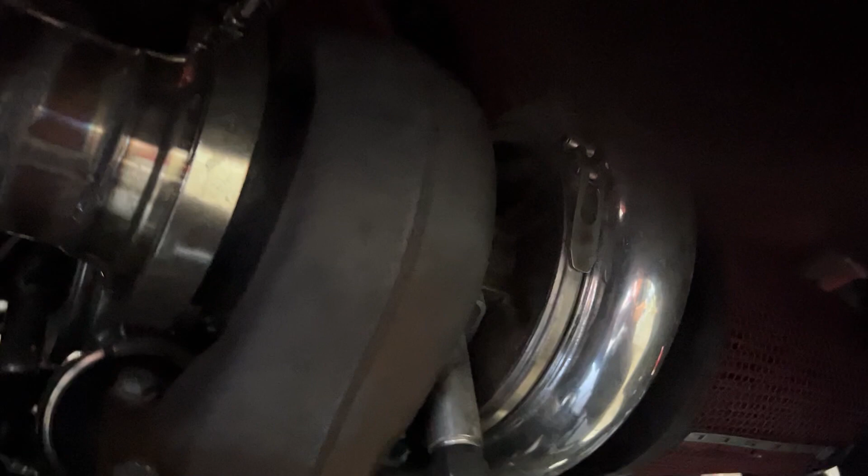Today's going to be a great day. I'm excited because today we're building an engine. It's one of my favorite things to do in the shop, building engines and transmissions. And today we're building an engine for my truck. This build was initially going to be for that other Mega Cab that I showed you guys.

We were going to keep it, but some things have recently changed, and I will share with you guys those changes as soon as I can. But as of right now, I gotta kind of hold it tight to my chest. It's gonna be good news, guys. Trust me on it. It's just gotta kind of hold it.

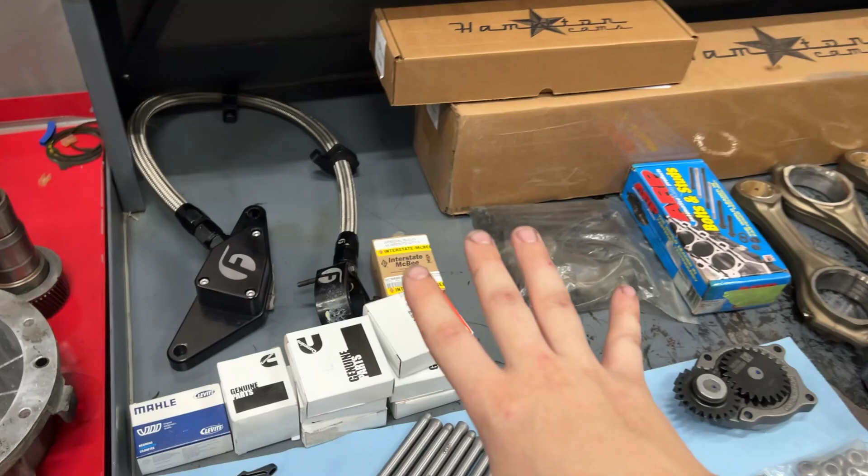So anyways, guys, let's go ahead and dig into the parts we have here, and we'll go over what the purpose of this build is. All right, to start off with, guys, we got this beautiful table full of awesome parts. We'll go ahead and start over here. So first off, we got this Fleece coolant bypass kit. It's a used one. It's one that I had on the initial build of the Mega, and I took off because I had this build planned. And this engine is going to be set up more for towing rather than making huge horsepower. As you guys can see, we got stock common rail rods.

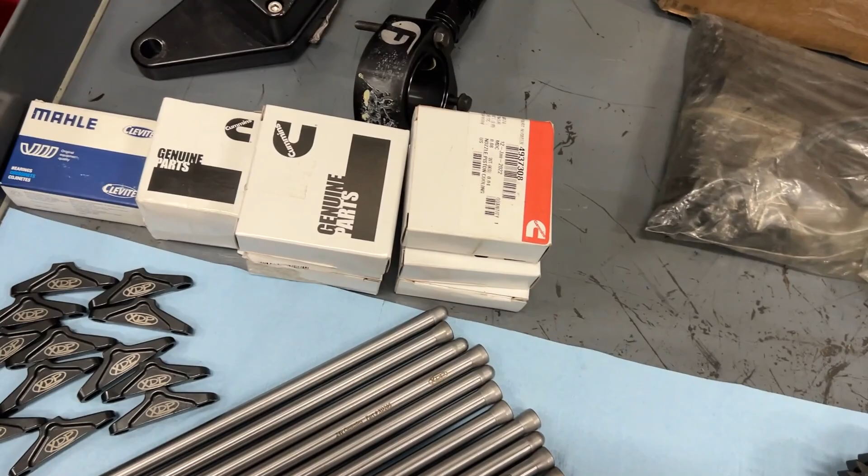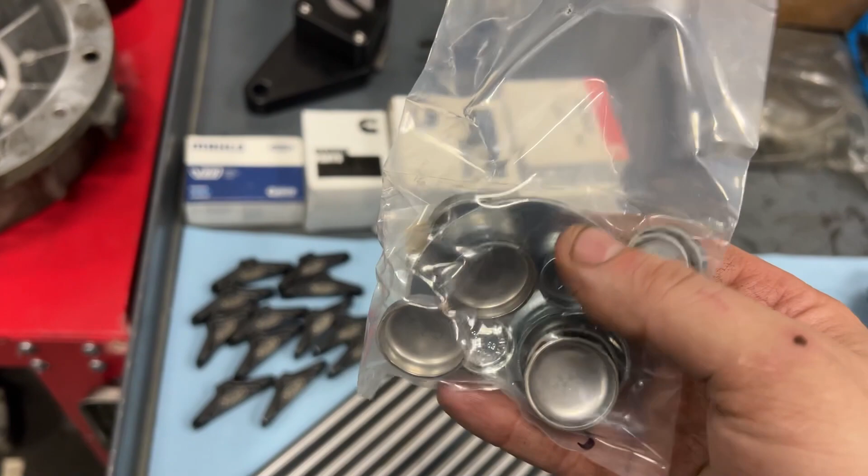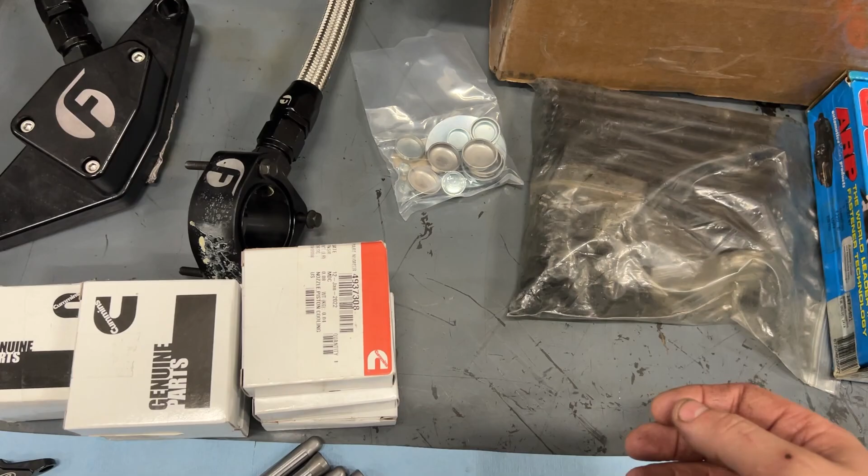But moving on, we got an Interstate McBee freeze plug kit. This is basically, it comes with most of your freeze plugs. It is a 12 valve kit. You can tell by this rear cam plug, but it comes with the freeze plugs for your oil galleys through the block, and it comes with some of the other ones that we use as well. I had the kit before that I was buying that came with the head dowels, but can't seem to find it. I'll have to do some research, but this is the kit we have right now.

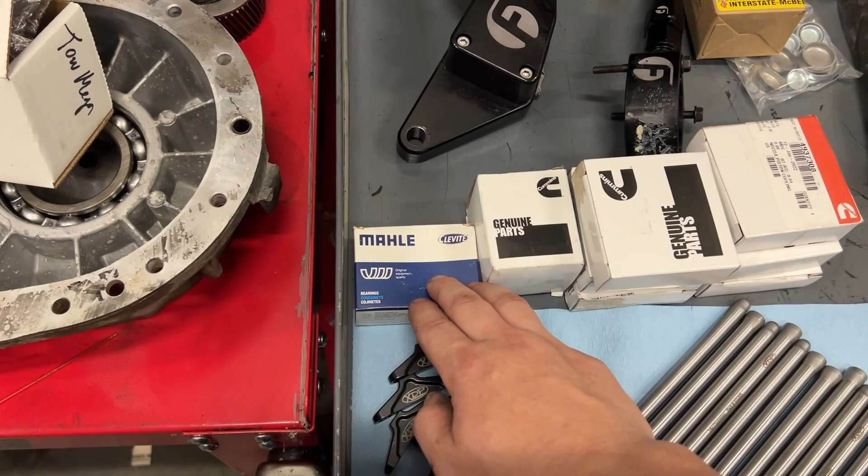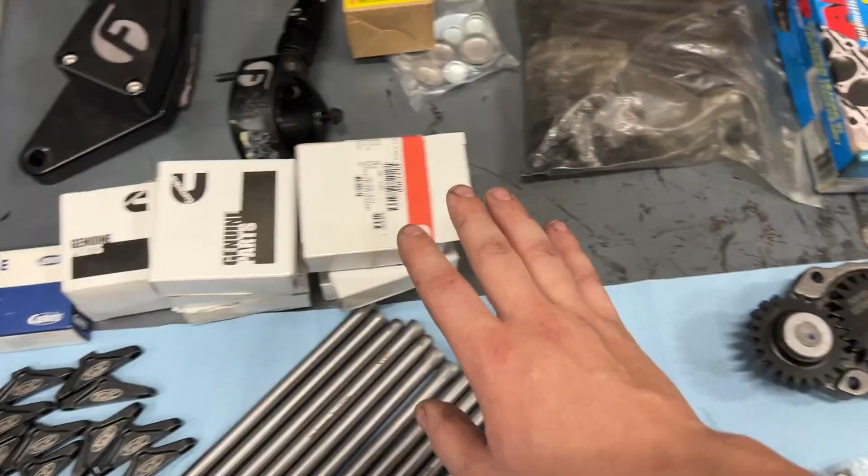Moving on, we got a Mahle cam bearing, and then we got a Cummins OEM thermostat, and then some more leftover parts from the 6.7 build. You guys remember when we built this engine a couple weeks ago when it blew up? I had these overnighted, but we went to Power Driven. We got some Cummins. These are basically just the piston oil coolers, J-Jets, whatever you want to call them. But yeah, that's what we got here. And moving on, we got of course an OEM Cummins oil pump, and I do have an oil cooler relief valve coming as well, just not here right now.

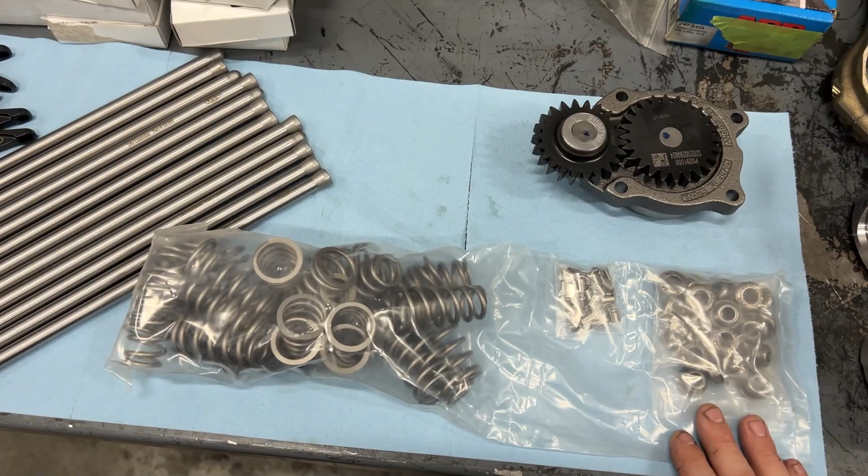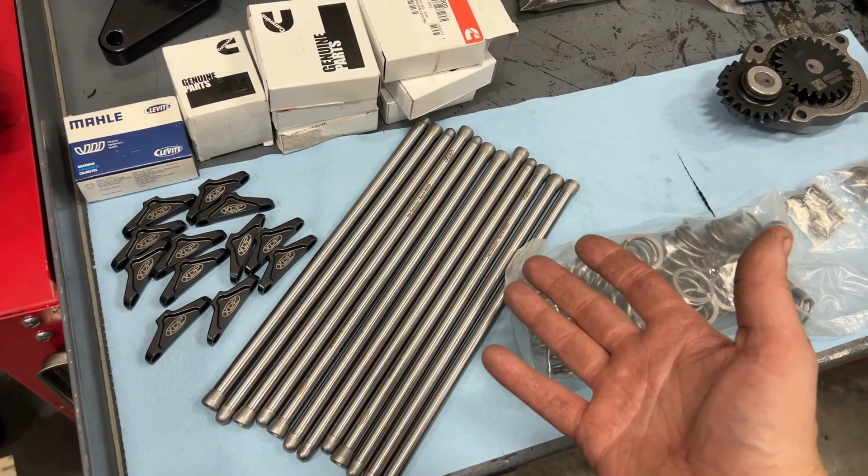I really appreciate them. But to start off with, we got of course some billet valve bridges, and then we got our 7/16 push rods. I went with the 7/16, even though this is a light build, because I don't see a reason why not to. They were about 40 bucks more than the 3/8 push rod, so I figured why not. If we do want to end up turning up this motor in the future, we already got the hardware for it. Also, it's not bad to have extras for the race motor, or basically have the same part so everything kind of moves around as I need.

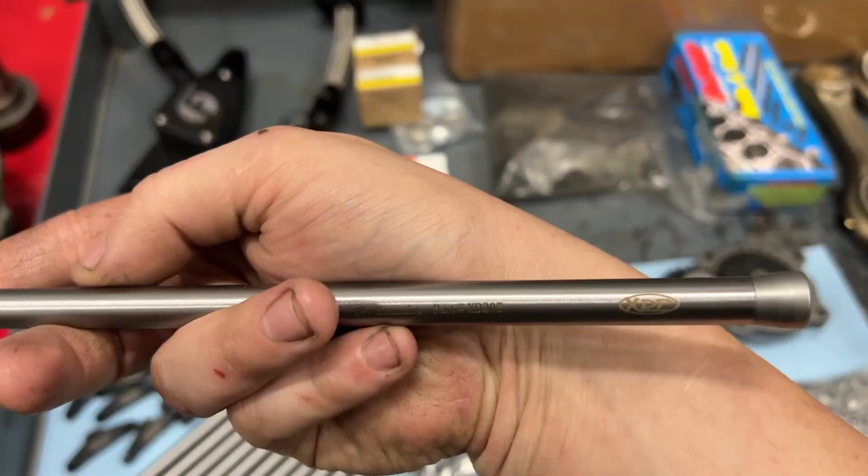And then for our valve springs, we went with the XDP ones as well. These are the higher strength for being able to turn up the boost. Again, I don't see a downside to upping all this, even though we're not going to be pushing major power right off the bat. And if you guys don't know, this is basically just Manton stuff, it's the same thing that a lot of companies use. They just rebrand. This is a Manton part basically that everyone rebrands. I mean, 90% of these companies out here, that's what they're doing. Nothing wrong with it. Can't blame them. One day I plan to do the same. Anyway, for now, I choose to go with XDP because, again, they take care of me. They always have it in stock, and the price is competitive, at least for me.

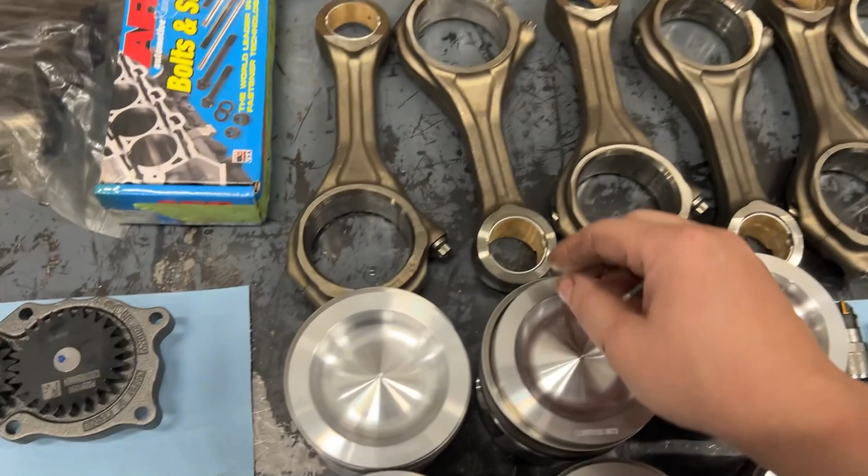So moving on, we got, of course, all ARP hardware throughout the motor. We got ARP rod bolts, and we already had the rods resized and checked, because when you get these ARP rod bolts and really any ARP hardware throughout the engine, what it's doing is providing extra clamping force. So this isn't a perfect circle. Now you take this extra clamping force and you've now changed that circle even more. Usually you make it tighter, so then you got to bore this out to get the clearance that you need as far as the oil clearance to the rod journals on the crankshaft.

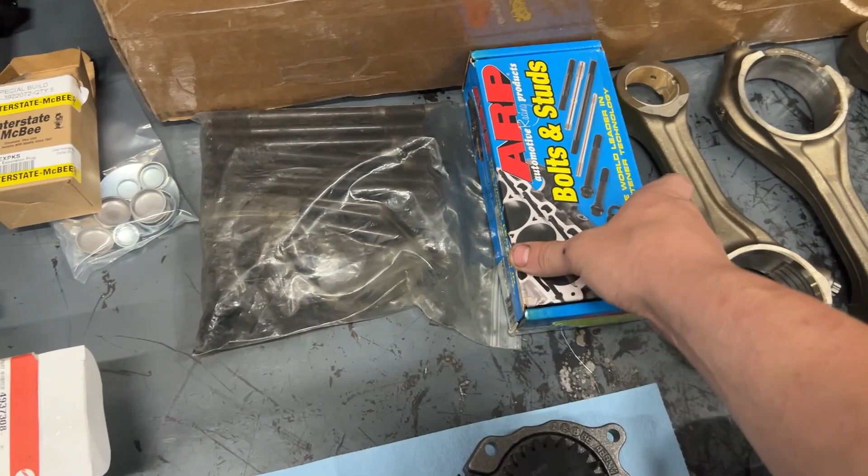We also got ARP main bolts. These are just 12mm mains, nothing crazy. Again, really the only reason I'm even going with these is because I had them.

This is actually, a lot of these parts too are left over from another build that didn't happen. So it's kind of just recycling old things. So we got ARP head studs, just regular ARP 2000s. But yeah, that'll work. And then of course we got ARP flex plate bolts, ARP harmonic balancer bolts.

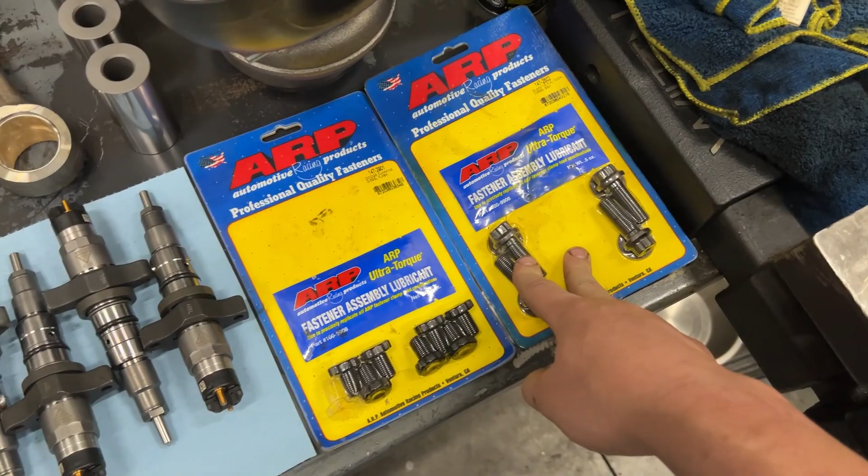Moving on, we got a Hamilton cam. And of course you got to get their tappets if you're going to run their cams, otherwise there's no warranty. It's a 178 208 camshaft. Now this is their towing camshaft. This is supposed to be good for small singles or small compounds.

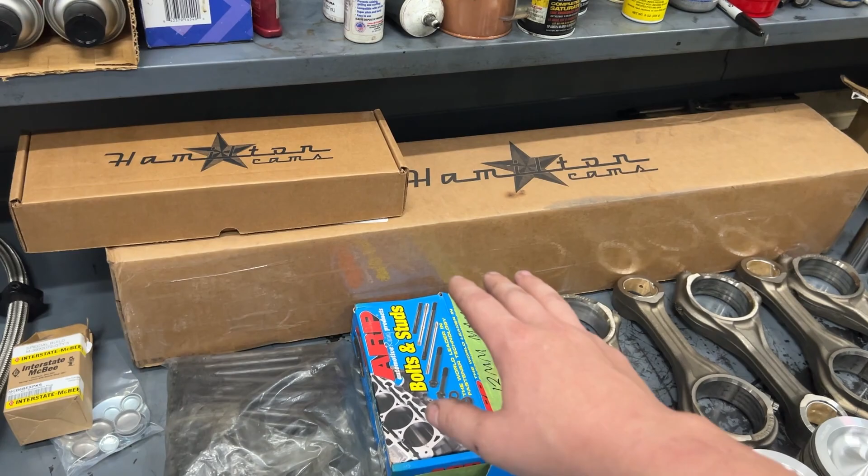Really just good for keeping the torque in the low end, allowing you to have just a good overall street mannered cam, as well as helping you with towing. I'm really happy we have the 188 220 cam in the 6.7 motor in the Mega. Been happy with it, so of course went out with the Hamilton cams again for the new build.

Moving on, we got some regular 5.9 Cummins pistons from Mahle. Nothing special. These are the wide bowl design. Now these were actually the original pistons I was going to use on the Mega's engine. I was going to do a sleeve down 6.7 to 5.9 bore and use these pistons.

But then everything changed. I ended up finding a good 6.7 block back in the day, and that's why we went with the 6.7 bore. So these are left over. So again, just kind of recycling old projects that didn't get finished or that changed direction a little bit.

Moving on, again, we got the rods. They're just normal rods, 5.9 common rail rods. We just had the ARP rod bolts put in. Went ahead, resized the big end. And then of course we got new small end bushings, wrist pin bushings put in and sized up for the wrist pins themselves.

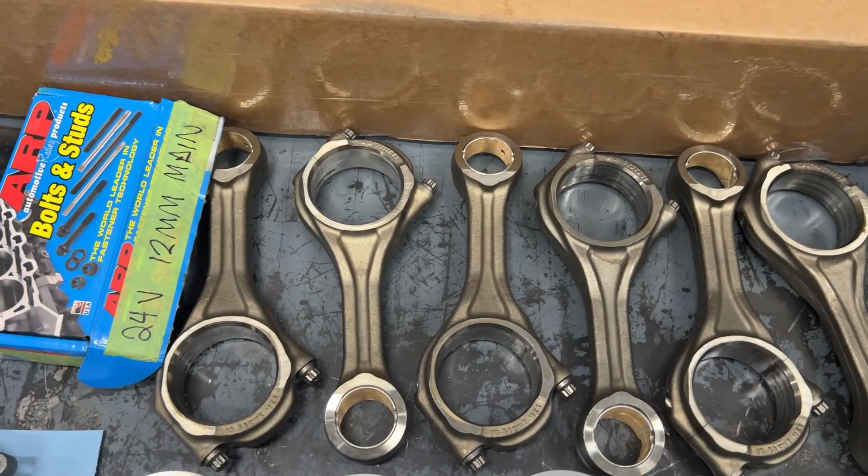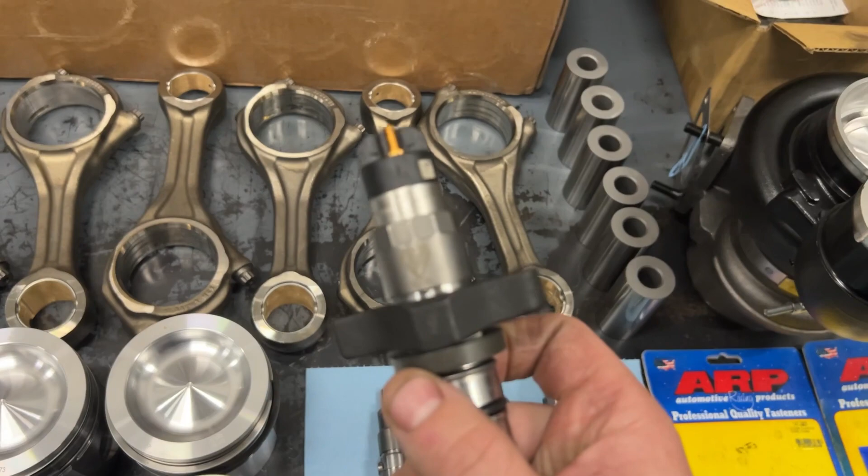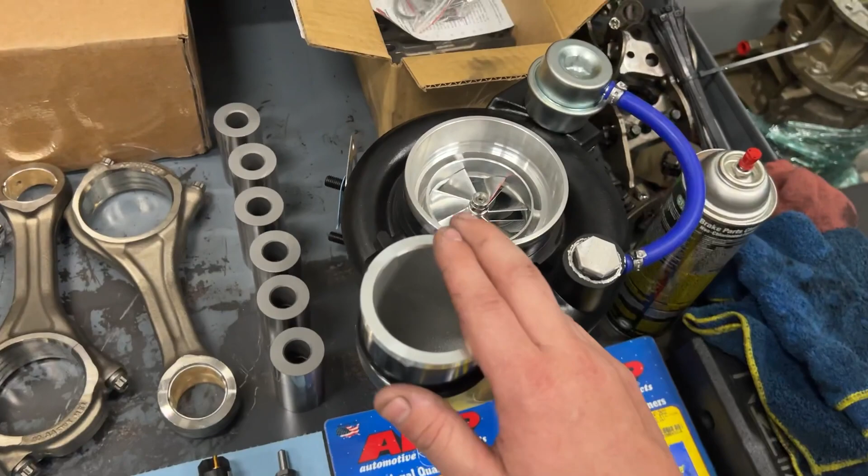Now for the power adders of what we're gonna run, first off, you guys know, DDP only around here. We went with the DDP 120 horse injectors. Basically a 45% over that will pair well with this 67 mil Taterbilt turbocharger.

So this build is meant for towing. I know this is a bit of an aggressive charger for that, but I will kind of explain to you the secondary goal of this build and why we spec'd it out the way we did. Obviously there's some other things we're not showing. This isn't a full build.

We got just basically Interstate McBee upper and lower gasket kit. I got the head fully rebuilt. The engine block is fully machined. And we're just gonna run basically a stock gasket setup, no fire ringing, nothing like that here.

All right, guys, now you know what we're putting inside this engine. Now we gotta get outside. We're gonna go put the engine block on the engine stand. We're gonna get it cleaned out. Then we can get it in here in the room and start working on it.

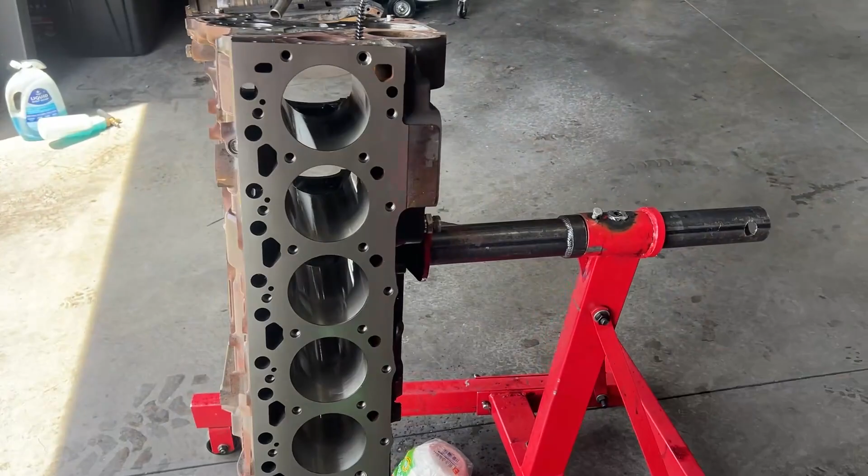All right, so we got the block all cleaned up. You've seen pretty much what we use. A little bit of Dawn dish soap, an Amazon special foam cannon. Got these Moroso engine brushes that you can get on like Summit or Amazon probably. I just keep them here because this is where I always clean up the engines. And then, yeah, so go through, scrub it all real good.

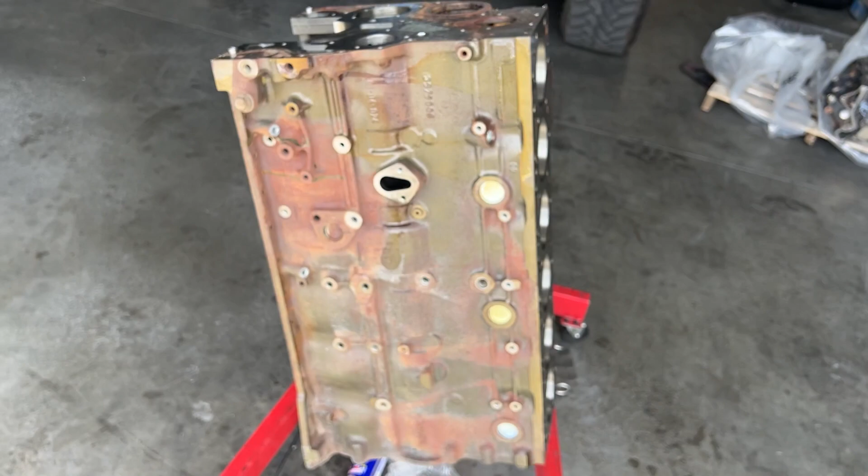Make sure you get the cylinder bores, but the main things are all of your oil galleys. The oil galley on the back side for the oil squirters for the pistons wasn't popped out, the plug wasn't, so that means they weren't cleaned out. Now the machine shop does do this cleaning usually, but we just do a bit more of a detailed cleaning. This is a trick that I learned from my buddy Josh McCormick.

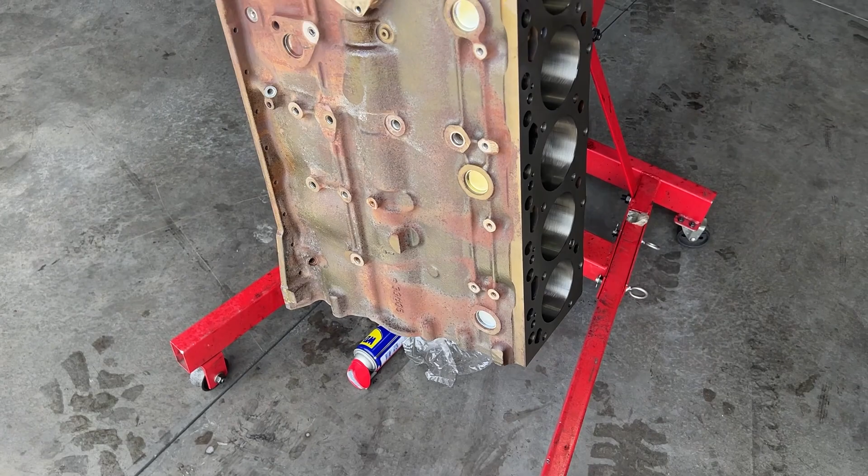And I found that they actually leave the least amount of residue as far as like that fiber material after you wipe down everything. They still kind of do on these hard cut surfaces, but I don't think there's anything out there that won't, so you just got to be careful. But they don't leave residue when you're wiping out the cylinder wall and everything, so I use that as a final cleaning. Then obviously once we're done, went ahead and WD-40'd all the metal surfaces so they don't rust. But little update over here.

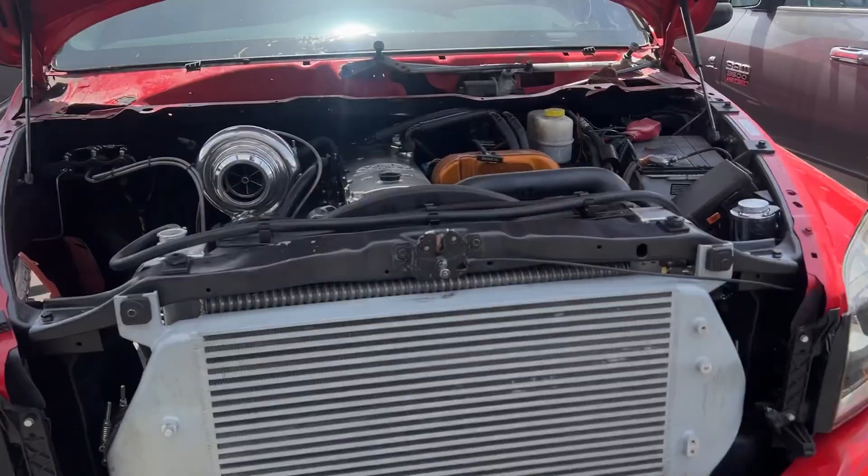As you guys can see, she's just sitting. And like I said, I'm building this engine to put in here. Originally it was going in there, but a lot of things have changed in the last week or so. As you can see, we don't have the compounds on.

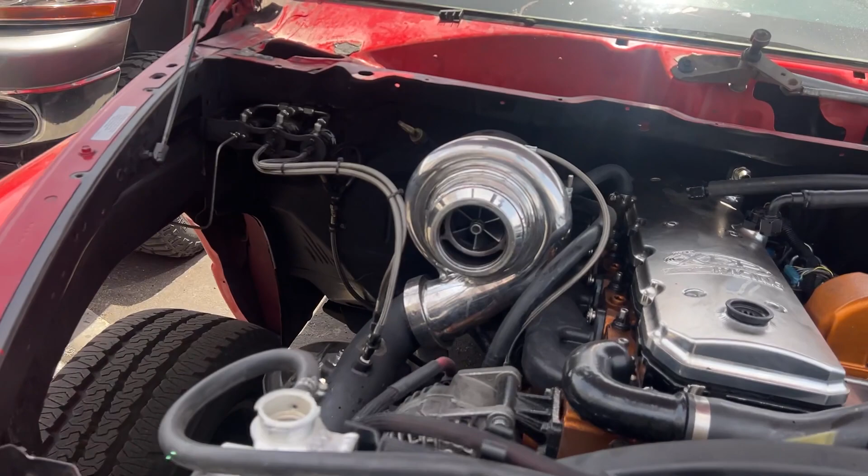I took the Power Driven 88 and sent it back to Power Driven. They're rebuilding it. It's a used unit. They're only charging me a few $100 to fix it. Like I said, it was used, so it's not like it was a warranty. I mean, she performed well within her bounds of reasonable use, I guess. But anyway, the engine's still running good. Everything's still working. The only downside is after we made that 1400 horsepower hit at Randy's dyno event,

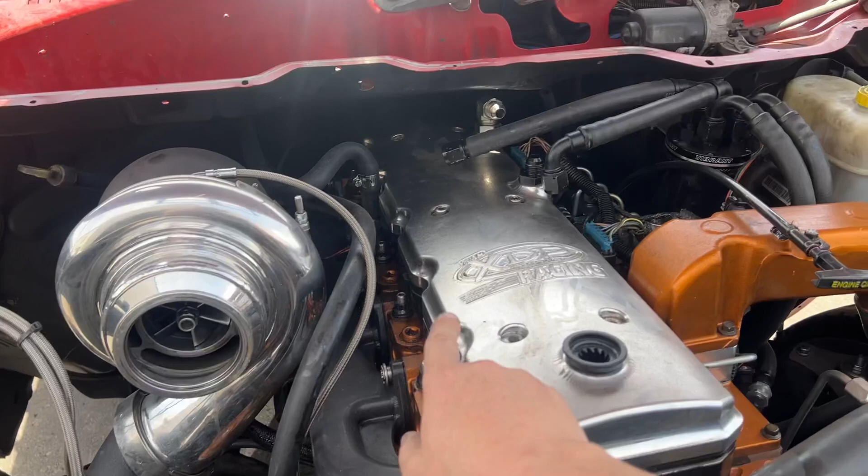we went back to the shop obviously, and I did an oil change, and there was actually quite a bit of coolant in the oil, at least a quart or so. So obviously thinking head gasket, went ahead, drained it, and then pressurized the cooling system. And I actually found that 2 of the studs under the valve cover are leaking coolant past those studs, and about 3 or 4 of the freeze plugs, the thread-in freeze plugs on this head, were leaking.

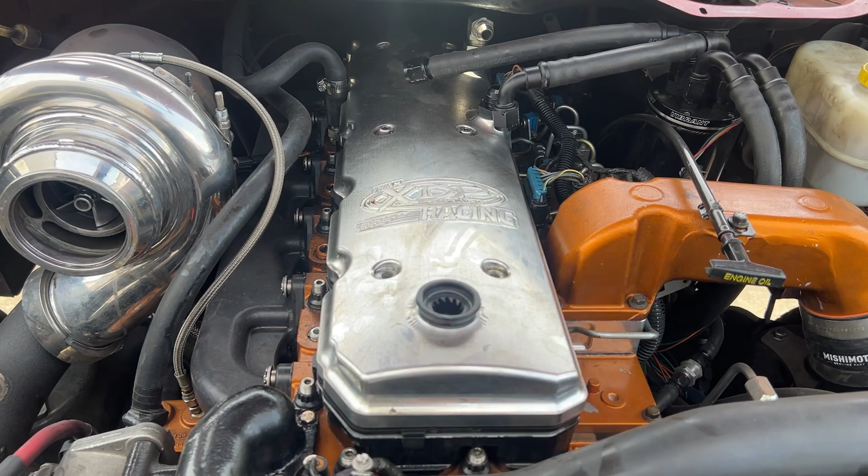So went ahead, resealed all those freeze plugs. I think there's a problem in the thread tapping in the plugs themselves. We'll find out. And we did a hot retorque. I just left the coolant out so it wouldn't drain into the crankcase again. And did a hot retorque, tested, still leaked, did it again. So I did about 3 hot retorques, and I did cold torques in between those, just to try to save the gasket a little bit. I knew it wasn't gonna last forever, but I was hoping I could drive it for a little longer.

Not the case. So I got 2 new Haisley fire ring gaskets again, and they were pretty much the last 2 that you can buy at the moment. So sorry guys if you were looking, but basically what we're doing is we're going to take this head off. It's a Power Driven ported head. They're stage 2, 3, or whatever. They're supposed to be like the race head.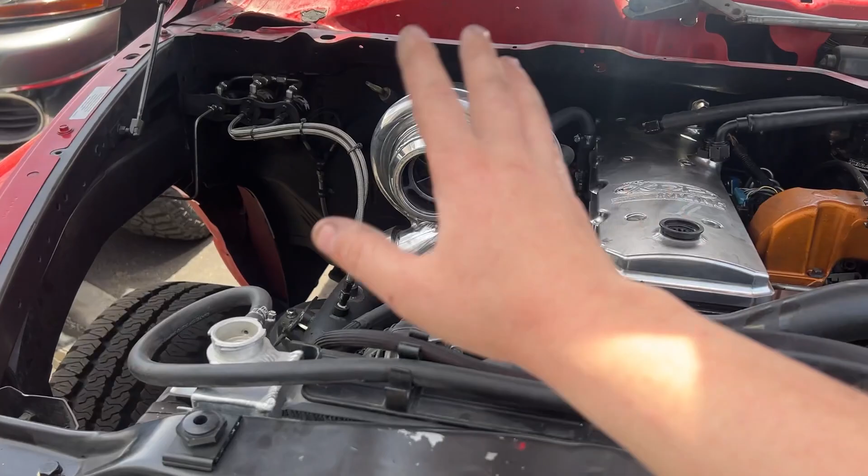I'm going to have the threads redone for the freeze plugs, and get new freeze plugs in there so they don't leak again. Have the head machine surfaced again, gone through, new seals, whatever. Then I'm going to sell this head because I actually have something better in the works that I will share with you guys when the time comes. So that's why we're going to pull this motor out and kind of put it to the side for a minute. We're going to work on some new stuff. I might change the fuel, might change the air. We'll see. I don't know.

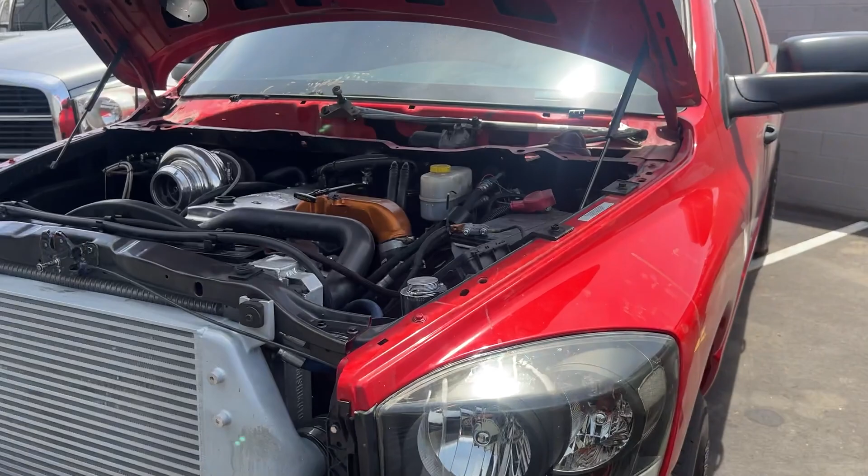But anyway, we're going to pull this motor out. I need a daily driver. My poor truck just sits here right now, and I miss driving it. So yeah, guys, that's pretty much why we're building this engine today. Even though we don't have another truck to put it in, we can put it in this truck and at least have something to drive for a while and still be able to play with it. So let's get this in the engine room and get started on it.

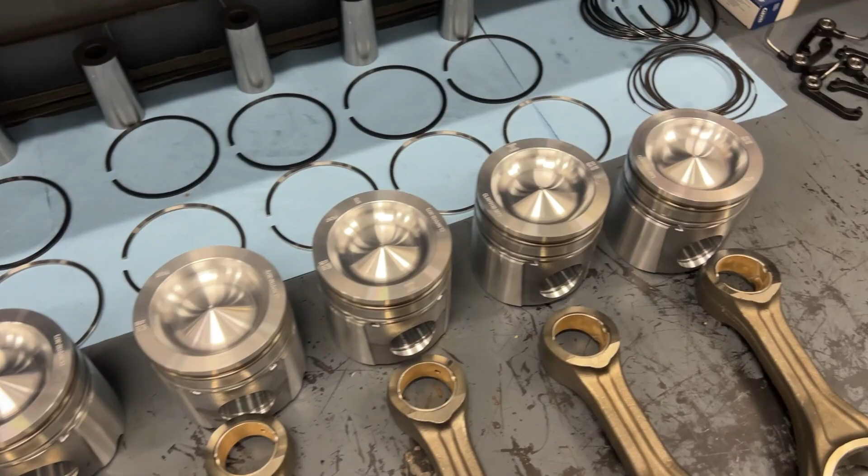All right, guys, so what you've seen, I went ahead and basically we got all of our cylinder specs done as far as double checking the diameter of the pistons. And then we also checked all of our ring gaps. And of course, we checked our piston to wall clearance. This is another thing that the machine shop does, because ideally you send out your pistons with your block. You tell them, hey, this is what I want it bored or honed to. In our case, we got a standard bore 5.9 Cummins, and we were able to just hone it out.

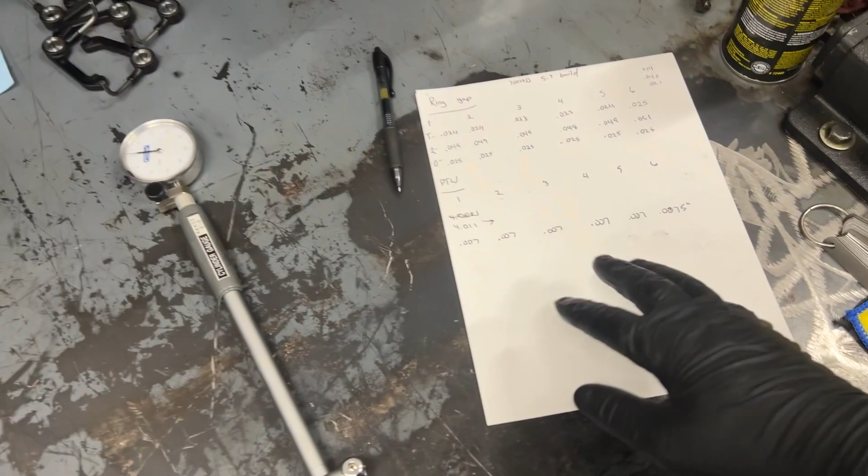I was shooting for 7 thou piston to wall. I ended up perfect, dead on, and with an extra 1/2 thou on cylinder 6, just so it can swell up a little bit more with heat. Again, this is something that the machine shop does already, but you just want to double check, make sure yourself. Doesn't hurt ever.

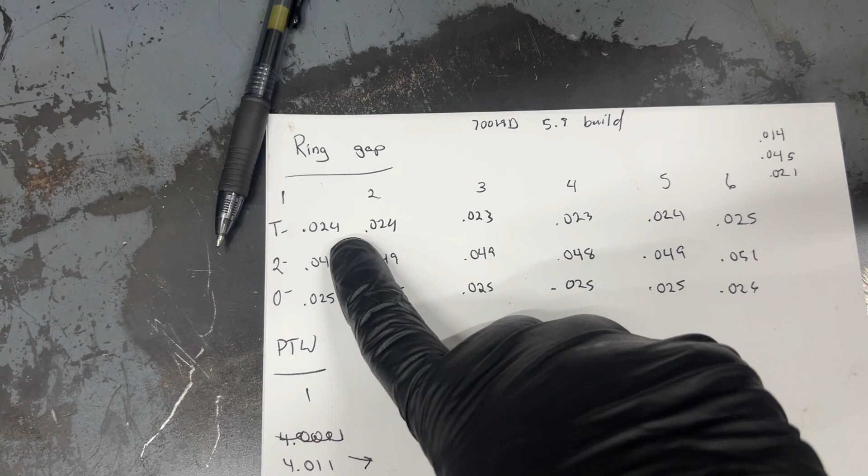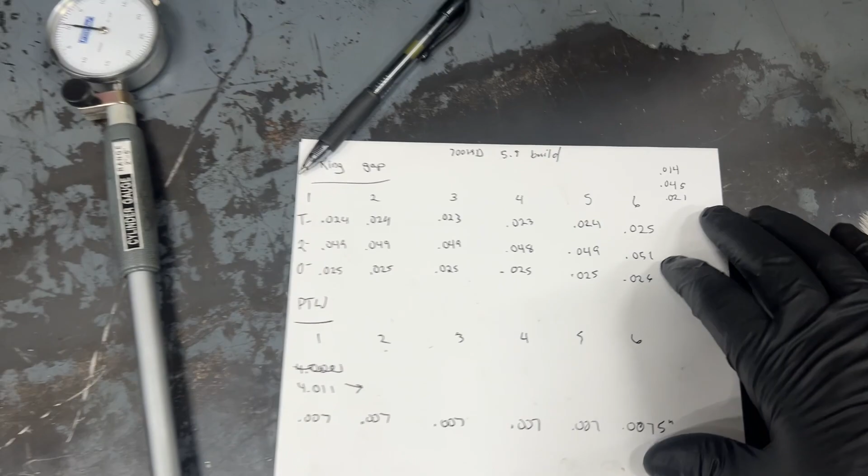Basically, this is what we got for our specs. We got 24 thou on our top ring gap, about 49 thou on the second ring, and 25 thou. I mean, it changes a thou here and there. Obviously, number 6 is a little bigger. So I think I'm happy with that. This is basically stock spec. You're looking at 14 thou, 45 thou, and 21 thou.

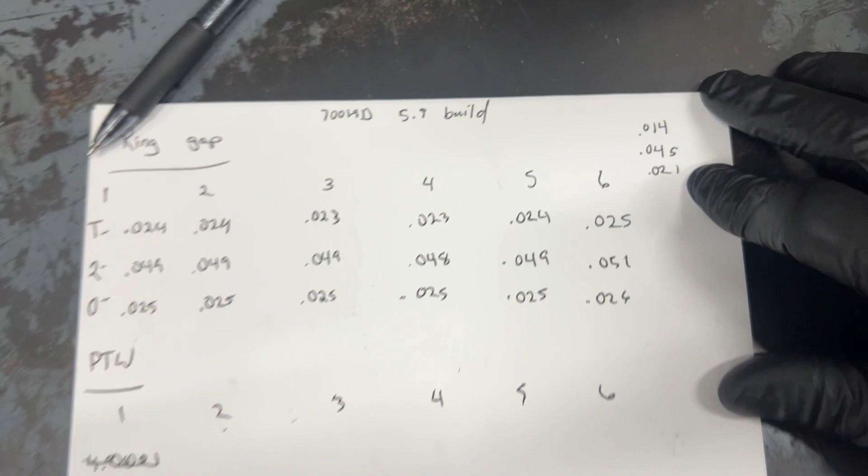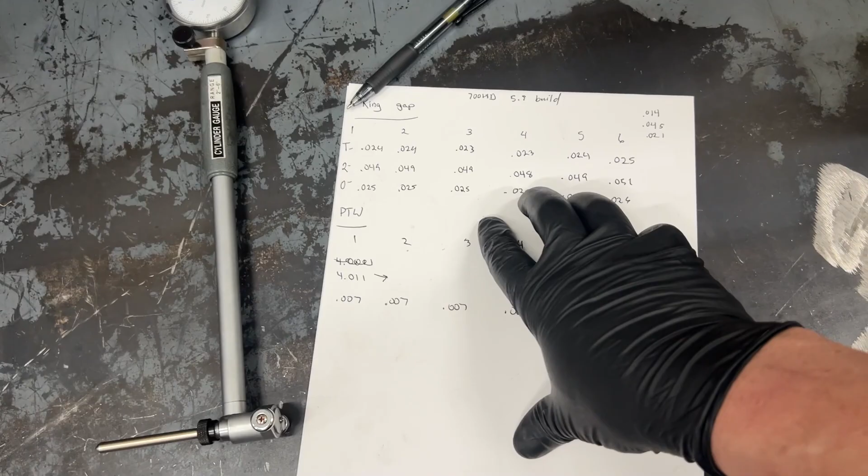I may or may not change these, open them up just a little bit more. If it was a customer build, I'd probably leave it alone. But seeing as I know I eventually will beat on this thing, I would like to have a little bit more leeway. Maybe not. I don't know. I'll kind of make my decision. We'll see. But really, the reason why you want to have more ring gap than factory, obviously, like I said, this is factory spec, and we got a little more piston to wall, our 7 thou piston to wall.

I believe max spec, I'll double check, but I believe max spec on a 5.9 standard bore in the service manual is about 4 thou piston to wall, maybe 5. And basically all that means is just this little bit of gap that you have between the cylinder wall and the piston itself. So the reason why our ring gaps are bigger and our piston to wall is more than stock is because when you get these really hot, these are cast pistons, when they get hot, they're going to swell up.

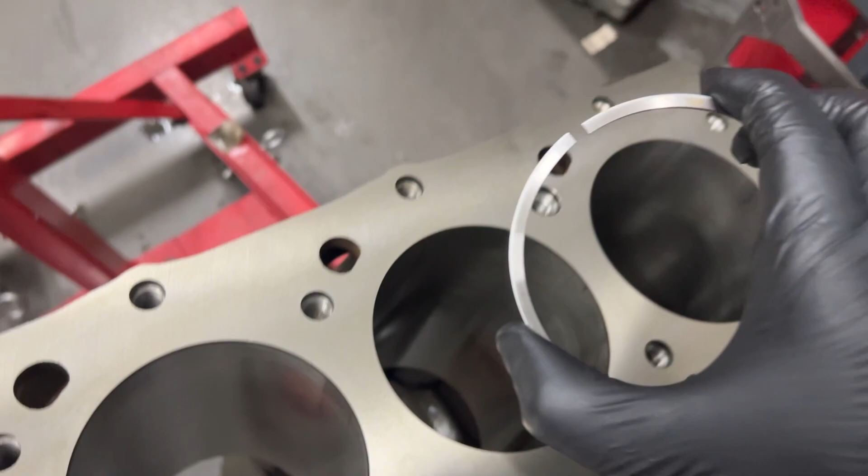They're going to actually get bigger, right? Metal expands, especially cast. It expands kind of quickly. So you want to have some space in between your cylinder wall and your piston so it can do that. Now, the reason why you want more ring gap is because as that piston expands, it's going to push that ring into the cylinder wall, right? So you're going to lose the distance, and that ring is going to get tighter and tighter. And what you don't want is these two ends to butt. As soon as they butt, boom, and that's when bad things start happening.

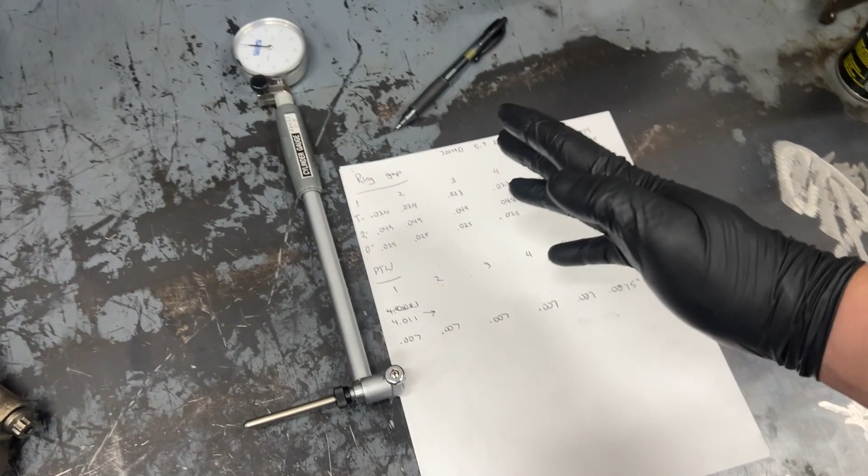So that's why on a stock engine, you will stick closer to these factory specs. I still like to get on the higher end. There's really nothing wrong with going on the higher end. But in this case, since it's a more performance-oriented engine, we definitely up the clearance quite a bit. If you guys remember, the 6.7 motor for the Mega is quite a bit bigger, but also it's set up to do a lot more power than this one should ever see.

So now we'll get the engine flipped over. We'll go ahead, put the mains in. We'll get some bearings going. I did forget to show you guys, I'm running the Mahle H bearings for the mains, and we're gonna hope these Mahle HX bearings will work for the rods, which they should, because according to Russell, these were measuring on the smaller side of specification. So hopefully the HX, which has a thou extra oil clearance, will be the ticket, because I don't have any other bearings. So let's cross our fingers there.

And same thing with the H. I do have HXs if we need. We'll find out. So I guess next thing we should do is go over there. We'll measure the crank, get the block flipped over, and we can start speccing out the bottom end as far as oil clearances on the bearings. So let's go.

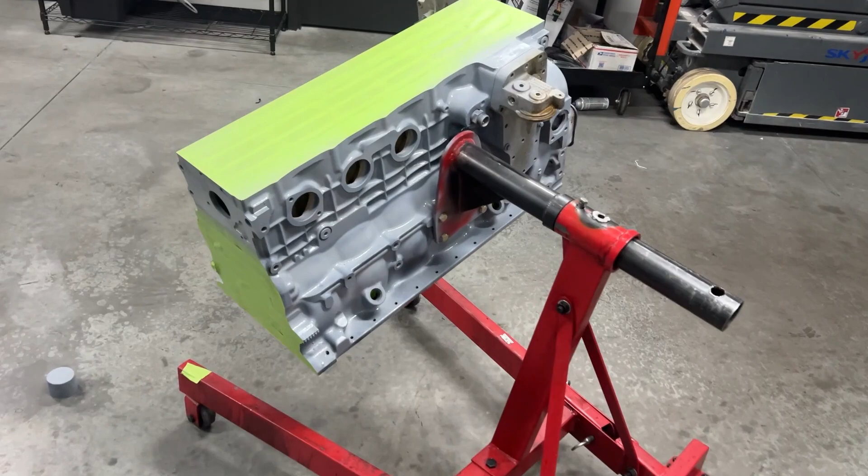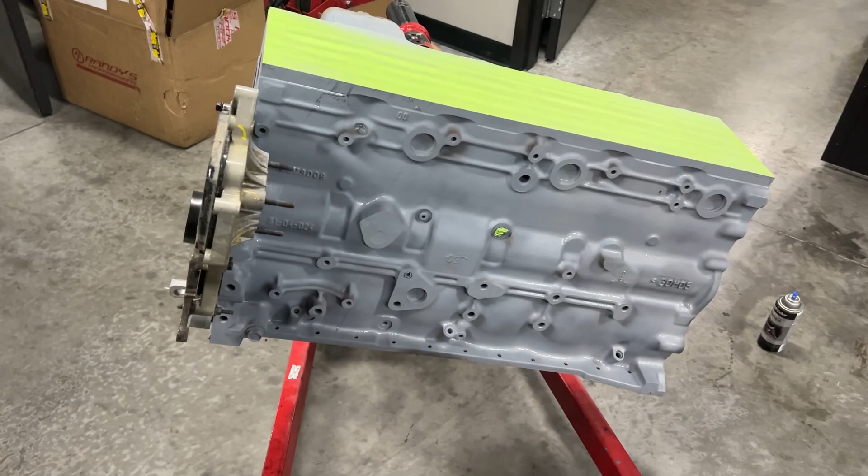So we got the block all specced out. Mains, right around 3.5 to 4 thou oil clearance. And again, I showed you, we got the piston set up. So now we're waiting for rod bearings and a few more things, so not much we can do. So gonna go ahead and start painting it. Got the first coat of primer down. This is the stuff I usually like to use, the Dupli-Color engine primer. I do about 2 coats of primer. And then we'll do 2 coats of paint, and then 2 coats of clear, and that usually seems to work pretty well.

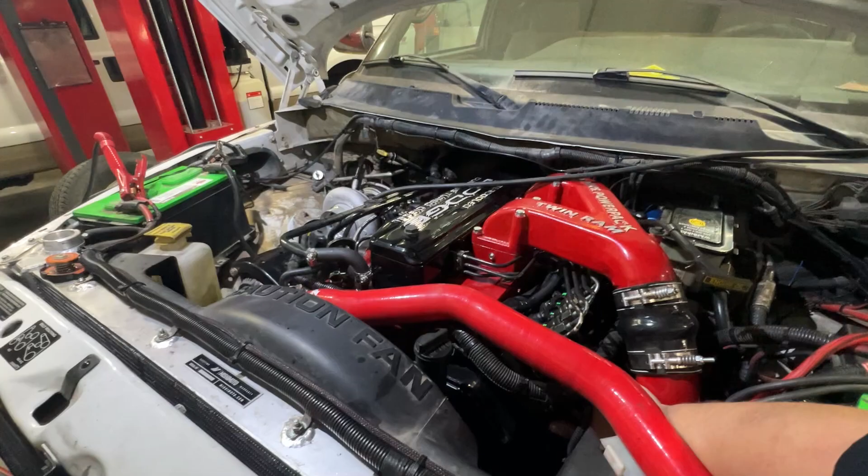Now the question is, go to my little aerosol area, what color should we do the motor? Kind of thinking this gray. I did a 6.0 a couple weeks ago like this, and it looked pretty rad. We could do a red and black theme, which would definitely fit the theme of the truck. Kind of like this 12 valve I just finished up a couple weeks ago too. I'll show it to you right now. I really like that one, so I don't know.

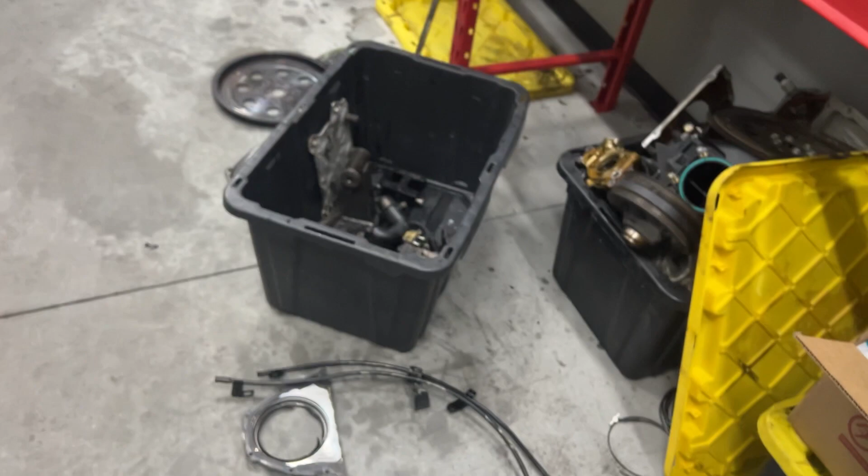We could go with the old gray, but I don't know. We could of course just go straight black, kind of keep it simple, and do an accent with the other pieces that are going to powder coat. Trying to keep this engine kind of neutral color, I think. That's why I'm leaning away from the red, because we may use it in a different build in the future. Obviously, it's not going to stay in the Mega because that's not the motor we need.

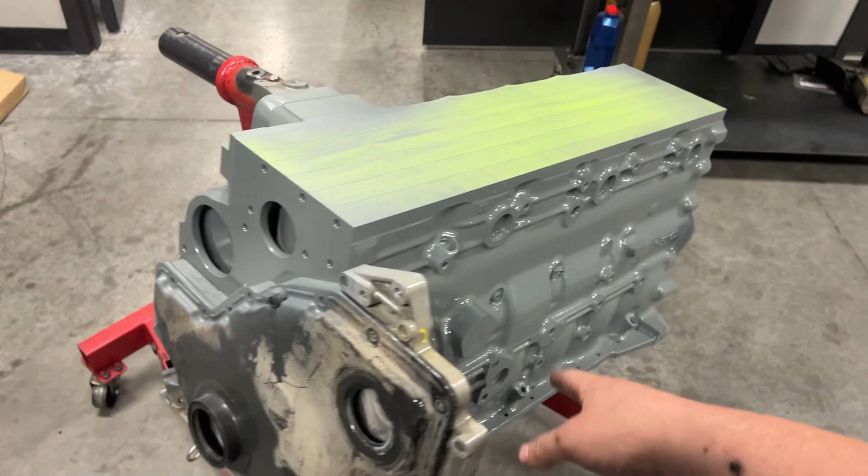Maybe it's a little boring to you guys, but I like it. It's kind of a clean, simple look. I'll do the block and the head in the same color. And then as far as all the other accessories, the timing cover, the timing housing, the flywheel cover, the oil pan, the rocker box, and the oil cooler, I have a color for it that

I've had in my head and I've used a few times, but I always did it with spray paint and it came out like crap every time I've attempted it. So I don't know if it's gonna make this video or not, but stay tuned. I think it's gonna look really good. It's pretty neutral. Some of y'all will like it, some of you won't, but whatever, it's my engine. So stay tuned for that.

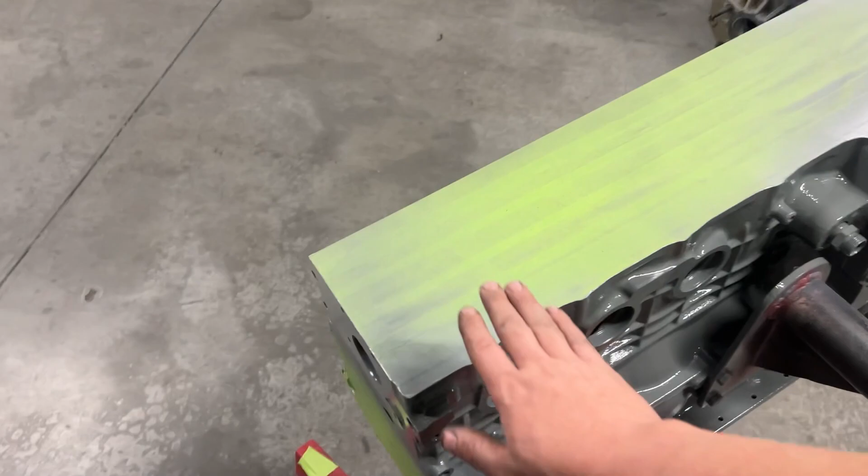Again, waiting on some rod bearings, and then we can get the rotating assembly done and continue on our measurements. There's some crucial measurements we got to do as far as our piston protrusion. We need to make sure our piston sticks out of the deck, not too much, but not too little. And then we can get the head on, start with our cam degreeing and everything else that we got to

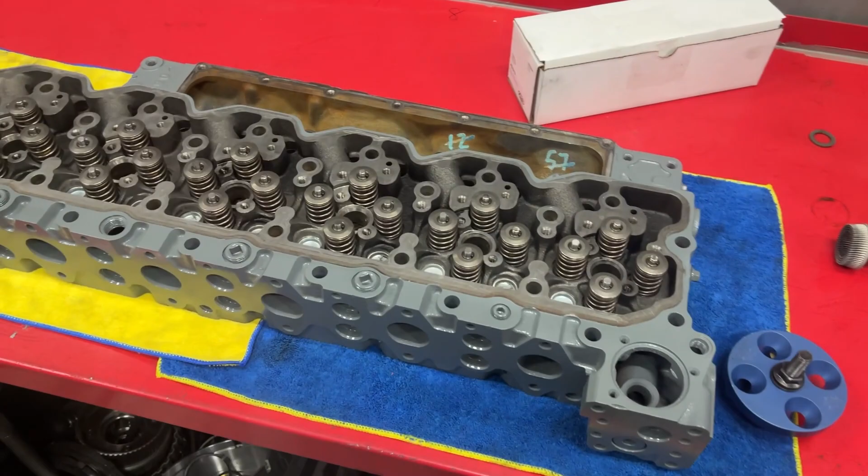do. We will start on that next. It's Saturday now, Monday's Memorial Day, so we're waiting on some parts. Tuesday we should have the parts we need, and we'll keep cranking away at this. We'll get the other parts sent off to the powder coater, and I will see you guys back on Tuesday.

All right, guys, so we're still waiting on a few parts for the engine, but as you can see, we got it painted up. I decided to go with the gray. I think it looks pretty sweet. And the color I chose to powder coat everything, I think you guys are gonna like.

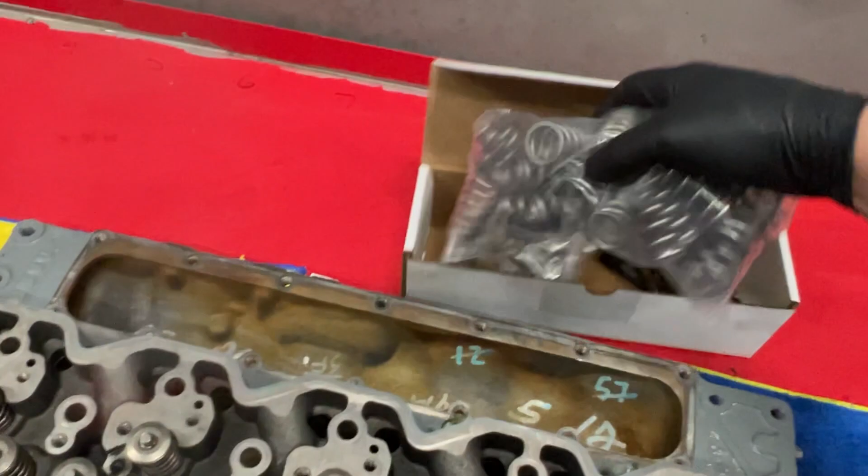So what we're gonna do is swap out these stock valve springs. We got the head on the table. We're gonna swap them out with those XDP valve springs right now. Pretty simple. You got a little tool. You bolt it in where the injector goes, turn it down, and that'll let you pull the keepers out, and just swap the springs.

All right, guys, welcome back. We're back at the shop. The other day you saw we got the valve springs on the head, and today I thought I'd spare you some of the boring stuff, at least of measuring the rods. Got all the bearings in, got the crank in the engine, torqued down, everything good to go. And we got our cam tappets in.

You guys see we didn't put any lube on the bottom here because we do got to degree the cam, and I don't want that extra lube to mess up any of the readings. Once we do the final assembly, we will of course lube everything back up. So now let's go ahead. We can get the pistons on the rods, rings on, and let's start slamming the bottom end together.

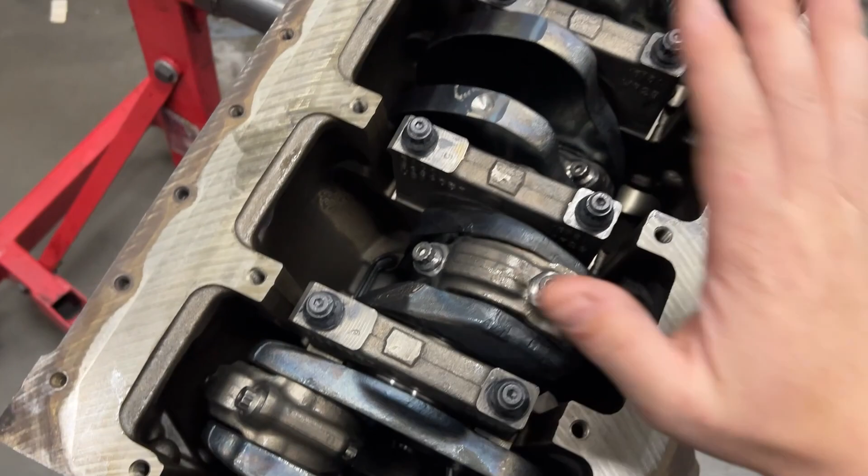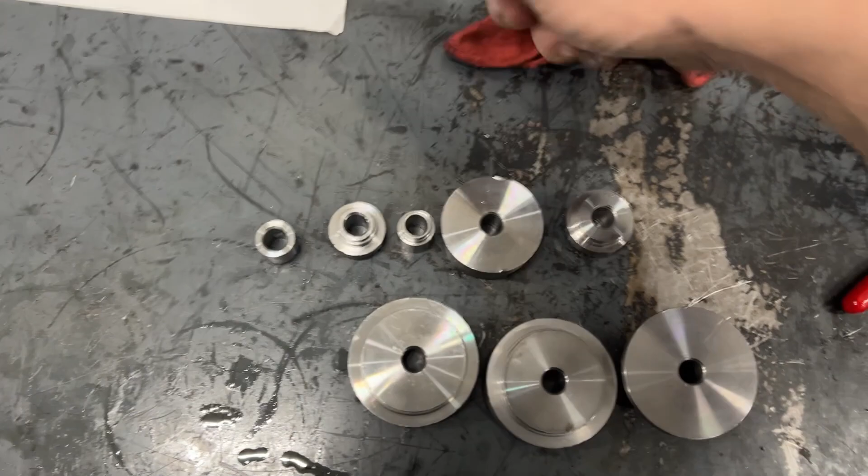All right, so now we have an assembled short block. We got rods in, crank's in, everything torqued down. Now we can start on the next thing. I want to show you guys just a quick little tool that I bought. This is from Lincoln Diesel. Pretty cool tool. Basically, it's a freeze plug installer. It'll pretty much install all the freeze plugs on this engine, and works for 12 valves, 24 valves, common rails, everything. Also comes with a cam bushing installer, which is pretty cool.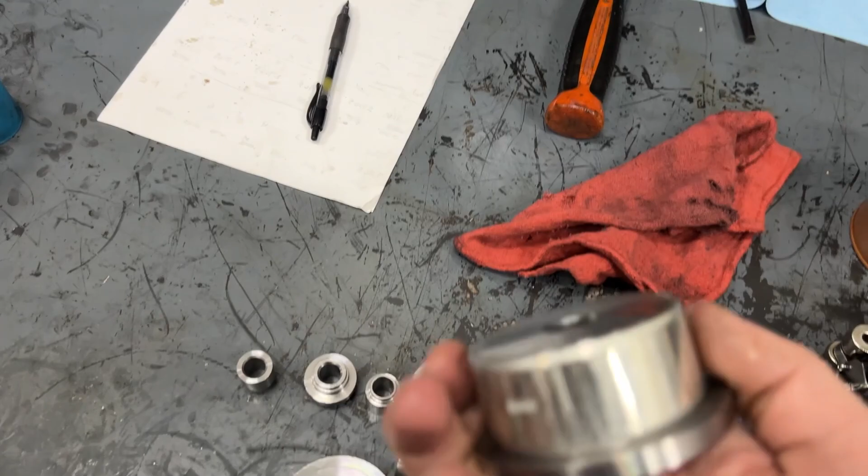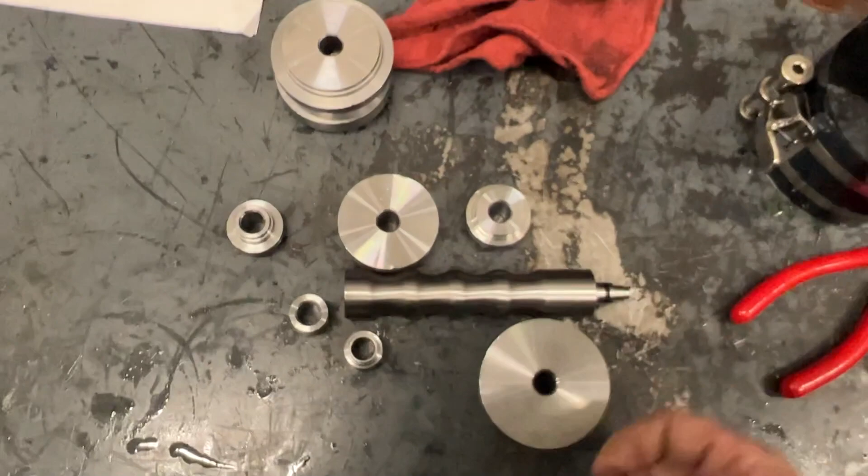Let me show you this one. This is one of the freeze plug installers. You can see it has kind of a machined lip here. So that way it'll press in your freeze plug to just the right depth, which is pretty cool. One of these, I gotta look it up, is for the oil galley. Yeah, I gotta double check which one does what. But it also comes with the oil galley ones, which is pretty cool because it'll set the depth just perfect. Pretty cool little tool. I haven't used it yet, but just by the quality and what it does, I think I'd recommend it.

So anyways, guys, I think I'm gonna leave the video off here, it's getting kind of long as it is. Next time we will get the rest of the motor assembled into a long block, we'll get the other motor out of the truck, and hopefully have a running engine. And I can also show you the accent color that we decided to go with on this engine, which I think is awesome. Like I said, I've been trying to use it a lot, and finally I think I did it right this time. Think it's gonna look really sick.